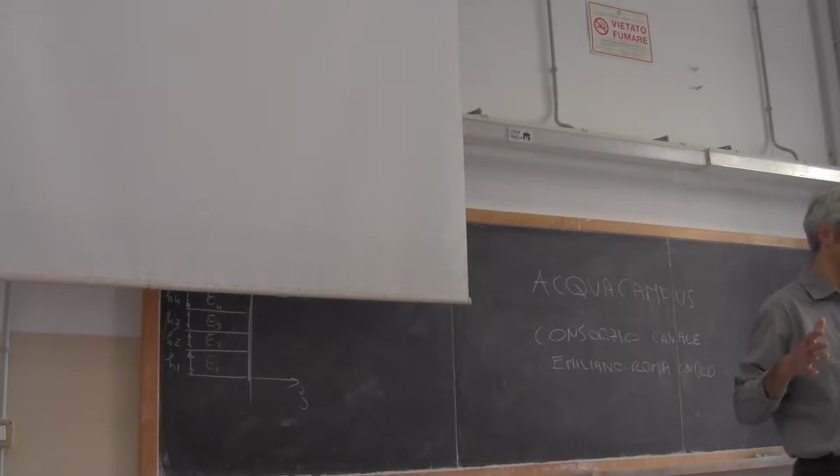They decided to set up testing facilities in a field experimental site, testing facilities finalized to test different irrigation techniques. So they basically test sprinklers, test the efficiency of gates operating on the canals, and they basically test what is called precise irrigation.

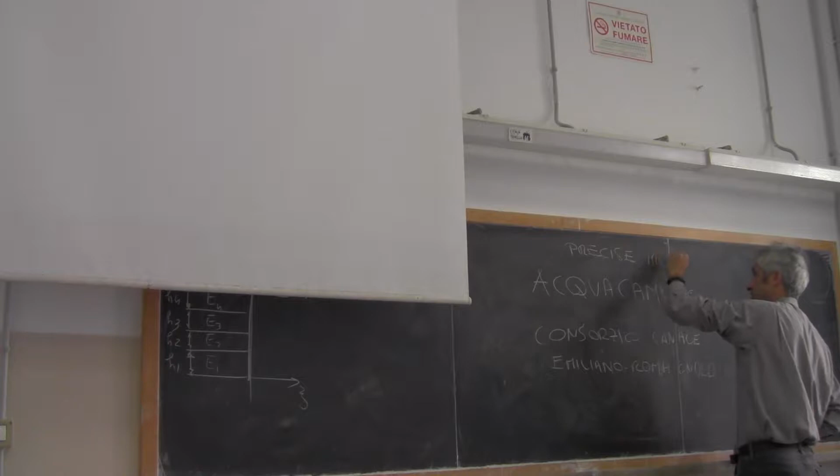What is precise irrigation? Precise irrigation consists in delivering directly to the plant the exact amount of water that the plants need. It is realized through maybe sprinklers, but more frequently through pipes that drop water directly where the plant is. These pipes need to work very efficiently because, as I already mentioned to you last week, if they are supposed to deliver the exact amount of water that the plant needs, this implies two things. First, a good estimation of the required amount of water by the plant.

Second, we need to make sure that that amount of water is actually delivered, which is not easy, because we cannot test every day if the pipe is working.

We need a kind of quality assurance procedure, and this is why they decided to test these irrigation techniques. The result is an experimental site where they continuously make tests and also dissemination. It's open to farmers to check the several different alternatives, open to students, and also open to the public in certain cases.

So what is the reason why we go there? The reason is that water for irrigation is the main water demand we have to deal with at the global level, the national level, and the European level. Irrigation covers about 70% of human consumption of fresh water, a percentage reliable at both the global and local level.

It's not what I wanted to get, but let me check. Okay, let's try, because we can't spend the whole day getting the PC working. So let me check what I wanted to show you.

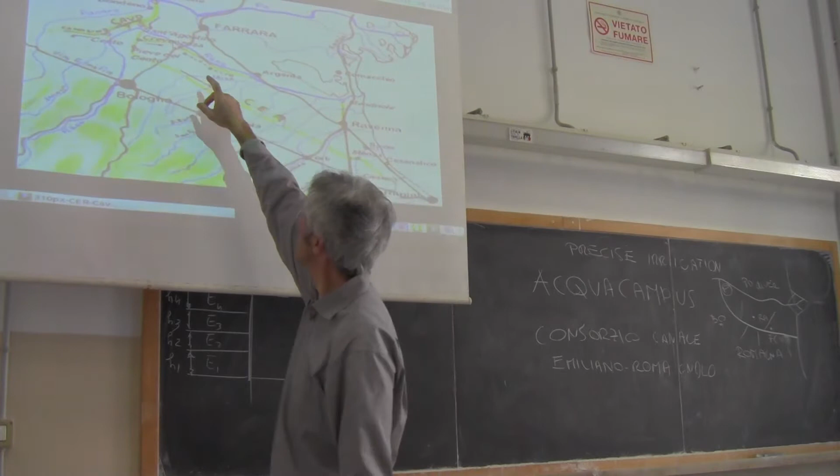Okay, there is a Wikipedia page, basically, with a map. So you can see here, up there is the Po River, and the canal is this one, or this one. So water is taken upstream from Ferrara a little bit, and then there is this yellow line, which is the canal crossing this flat area.

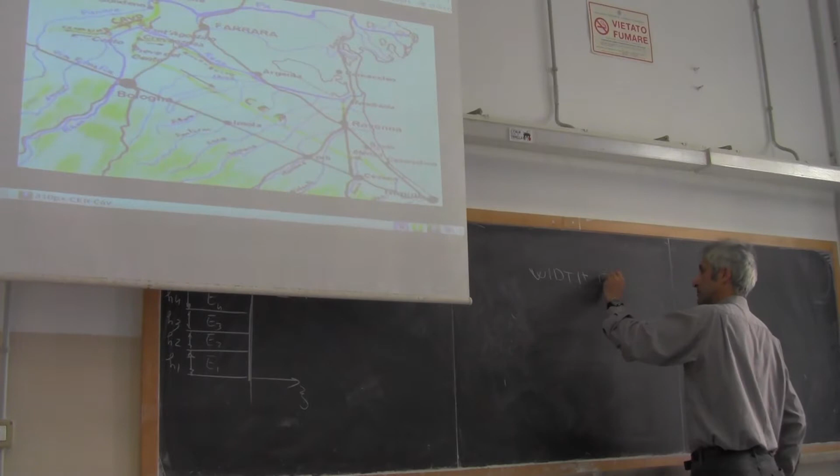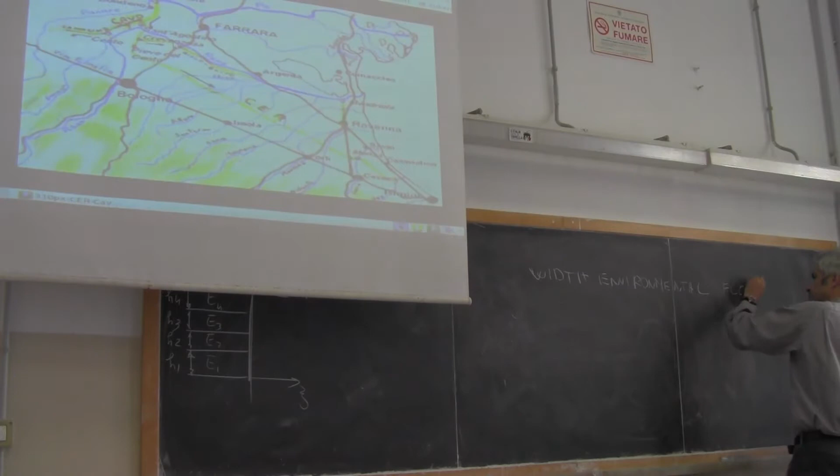Second thing before we move forward: we were supposed today... I asked you a question on Tuesday. The question was why our clients want to reduce the width of the environmental flow spillway. Width, environmental flow, spillway. So did you think we have any reply to this? Environmental flow, spillway. So, who has a proposed reply?

Nobody? It's not possible. Yeah, please. Excuse me, I have a question. You mean to reduce the width of the environmental flow, or the volume? No. What I said is that the environmental flow you have to release is the same, it doesn't change. And what is the definition of the environmental flow? It is required that you don't take any water from the river unless you have the environmental flow released downstream.

My question is related to how to release it. So if I go back to the figure, let me get the figure of the spillway. Unfortunately, I need to dedicate some more time to this projector because it doesn't work well. Okay, but in any case, let me get this figure.

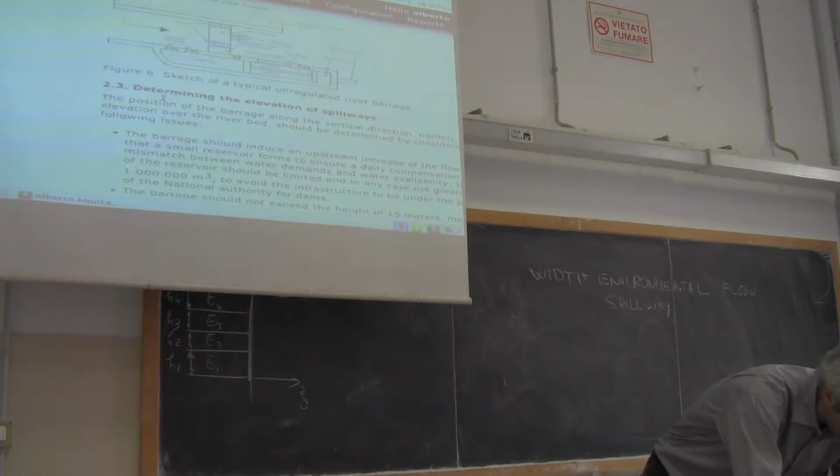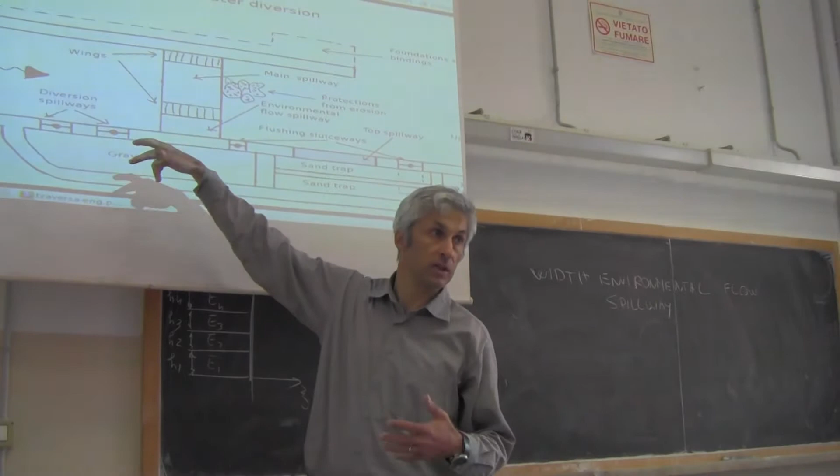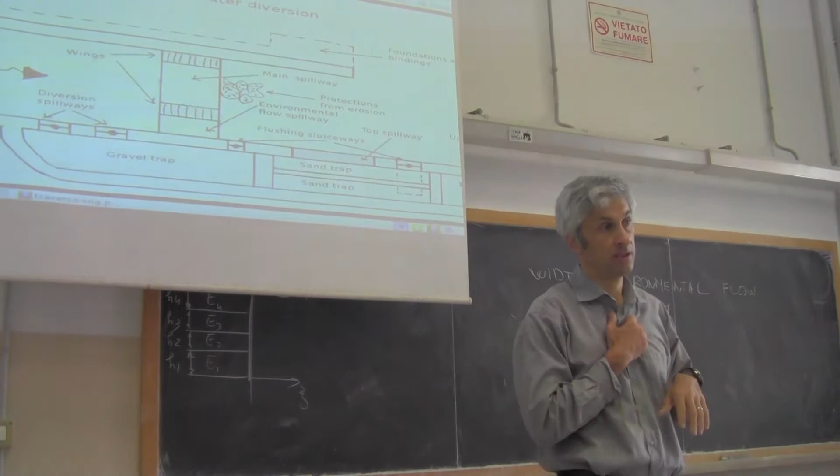So okay, this is the figure, this is the environmental flow spillway, which is located at a lower elevation with respect to the other spillways for the reasons that we know. And it has a width, something we have to design—typically 40 or 50 centimeters. My question was, why that width? Our clients want to make it not as large, like 20 centimeters, but we say no because we want fish to go through it, so we say 40. But my question was why they are interested in reducing the width of the environmental flow spillway.

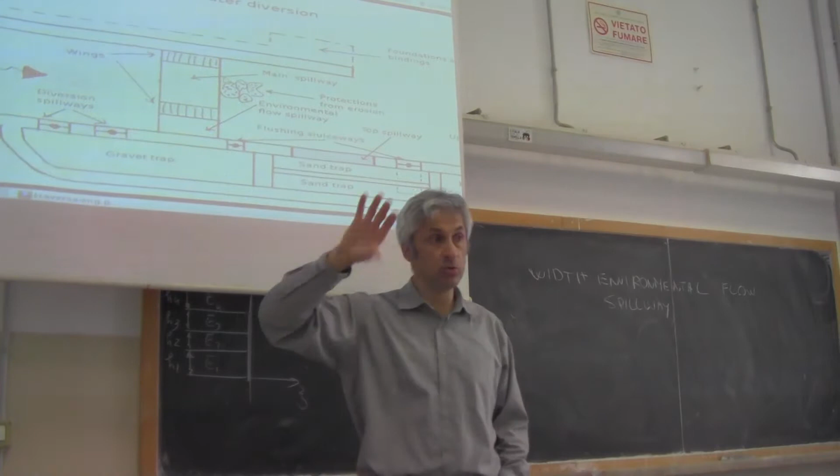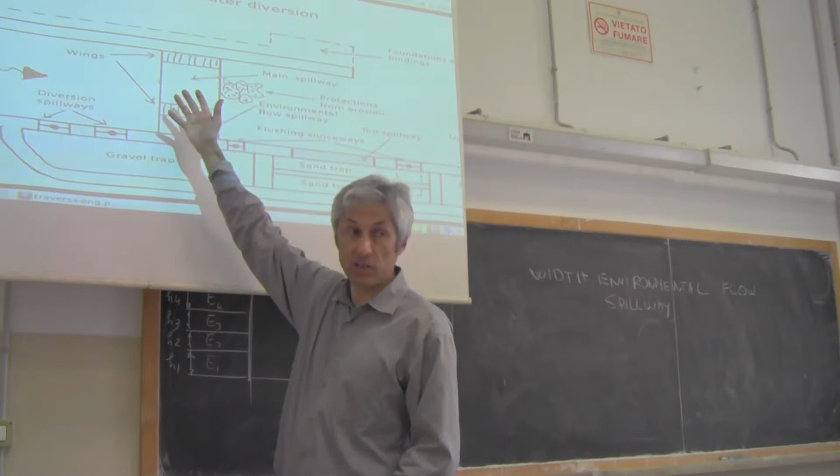Another thing I said is it's not regulated—we don't have a gate there, so water must flow without any facility that allows us to regulate the environmental flow. Any other suggestion on that? It's not easy, I understand, but no idea. We could make it even larger—if the river is large enough, we could say let's take it 1 meter wide, so we're sure fish pass through, and it's more accessible, but they say absolutely not. To reduce the cost?

So, do we have more velocity? No. Let's say, not to reduce the cost, but to increase the benefit. Maybe for flood mitigation? No. Because you reach the diversion spillway sooner? It's a bit close, but not really, because you know the diversion spillway, you locate the elevation by imposing that you reach it once the environmental flow is released.

Okay, first of all, did everybody understand my question? Yes, okay, so it's not a problem of understanding. Okay, now let me tell you the reply, and then I make some considerations.

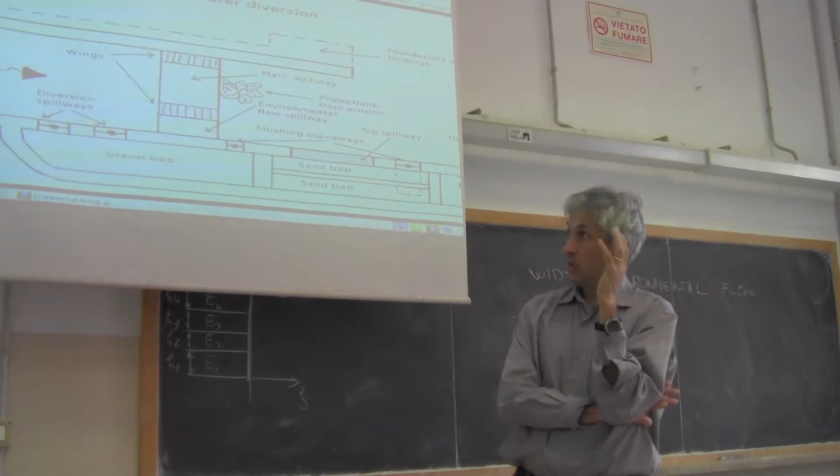What happens here? You have to think at what happens, look at the process, think at the functioning of this device, of this barrage. Every time you have a question, something you don't understand, look at what happens. Ideally you would go there to look at the functioning, and I'm quite sure that if you look at it, you understand why. But if you don't have the opportunity to look at it, you have to figure it out.

So what happens here? Let's suppose we start from a dry situation, and then some flow arrives. The flow goes downstream through the environmental flow spillway because it's the lower one. Let's suppose the flow from upstream increases. Then the water level increases upstream, in the pool that we originate upstream. The water level increases, and by increasing the water level, you increase the water flowing through the environmental flow spillway.

Why is that? Because remember there is a relationship to compute the flow through a spillway, which I write again here: the flow through a spillway Q is given by a coefficient μ, which we take as constant, times the width of the spillway—the width that our clients want to reduce—multiplied by delta H to the power of 1.5, times 2g to the power of 0.5.

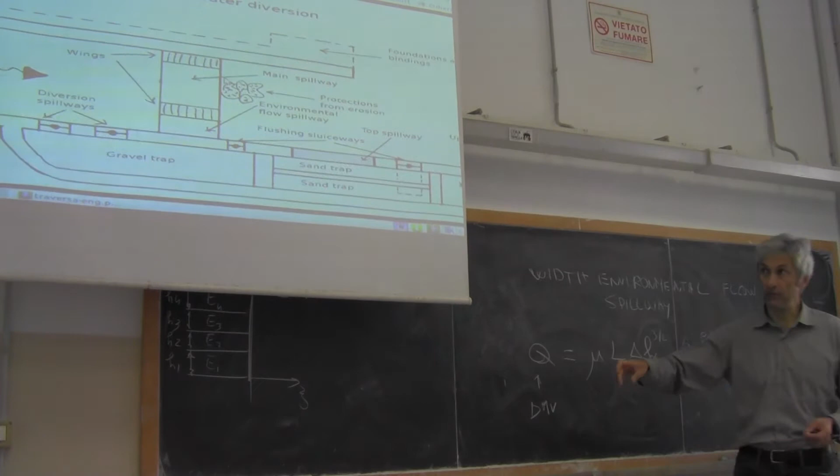But with increasing flow upstream, this delta H increases as well. And we want delta H to increase, because if it doesn't increase, we cannot get any flow. So in order to get our design flow, we need this delta H increasing again. But if delta H increases, the flow through the environmental flow spillway increases as well and becomes larger than the dmv.

This is something the client doesn't like. Ideally, the client would like that once we release the environmental flow downstream, it doesn't increase anymore. So ideally they would like to put a gate there, because they want to reduce the cross-sectional area of this release of water, to keep the release constant, equal to the environmental flow. But they can't put a gate there.

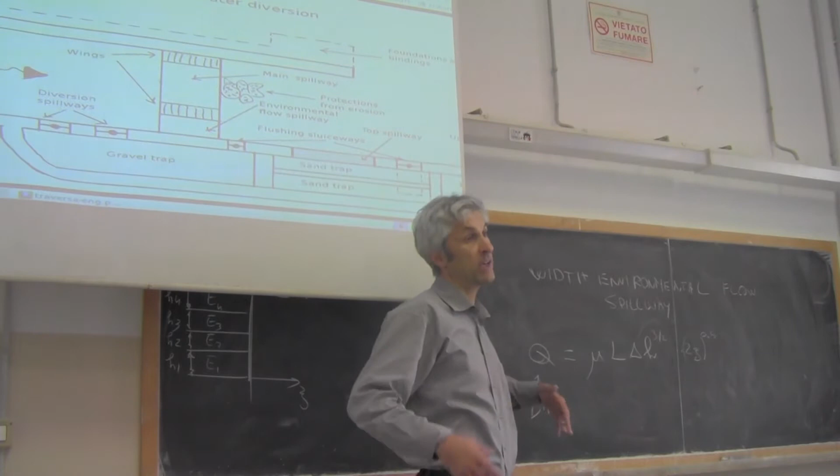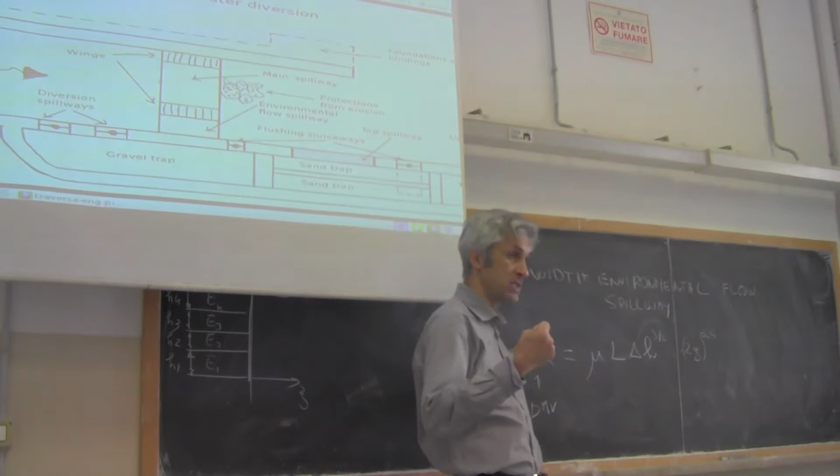This is one of my premises: I said we can't put any regulation facility on the environmental flow spillway, and therefore the flow through it increases as they withdraw water, and becomes higher than the dmv. This excess of flow is a loss for them—it implies a reduced benefit.

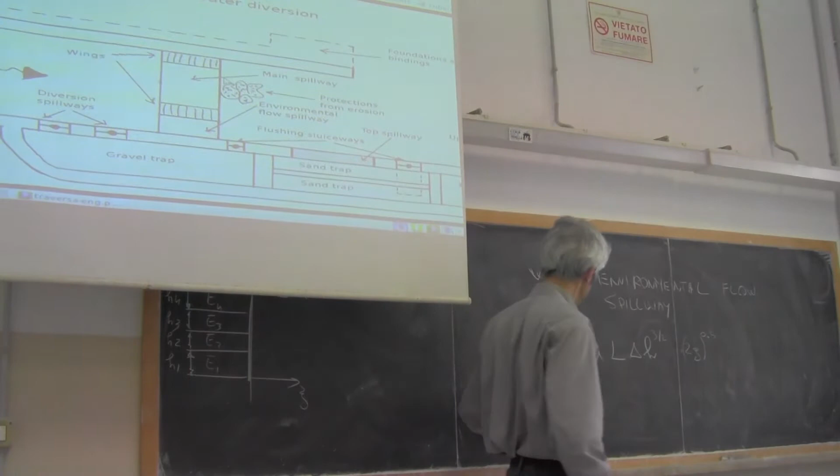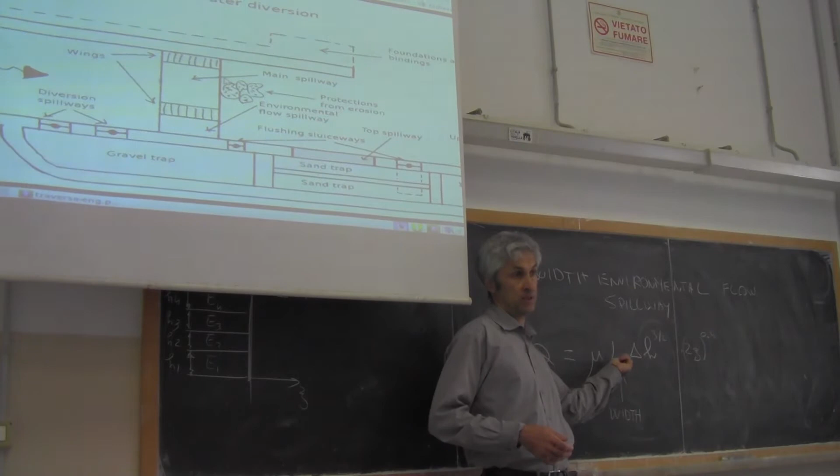How much does this flow increase for increasing water level upstream? The increase is given by this relationship, and you see that the larger the width, the larger the water that is consumed for them—this is the width. So they realize this, and therefore they say, please reduce this, because it's a way to limit the excess flow through the environmental flow spillway.

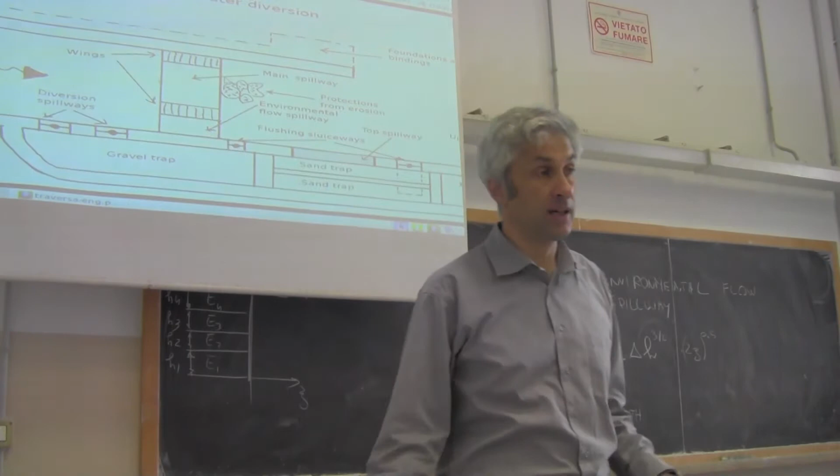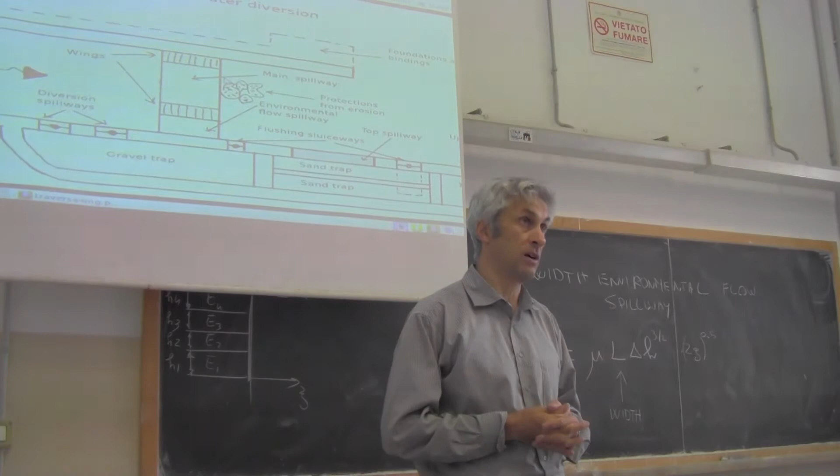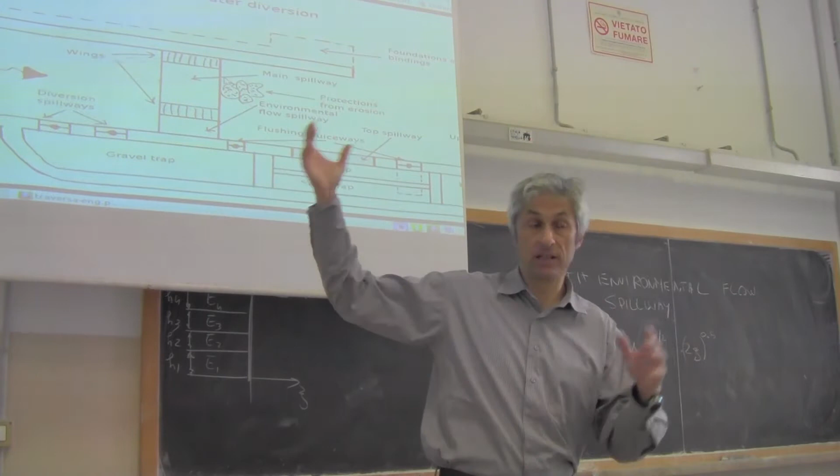It's not an easy question, but you should have found your reply by thinking about how it works, about the processes, thinking about water flowing through this barrage. This is a general suggestion I give to you. There is a saying attributed to Leonardo—actually it seems he didn't say it, but we're not sure—that when you deal with water, you first have to use experience and then the theory, meaning use expert knowledge first and then the theory. I think it's a useful example: when you design something like that, try to figure out how it works, and then use the theory.

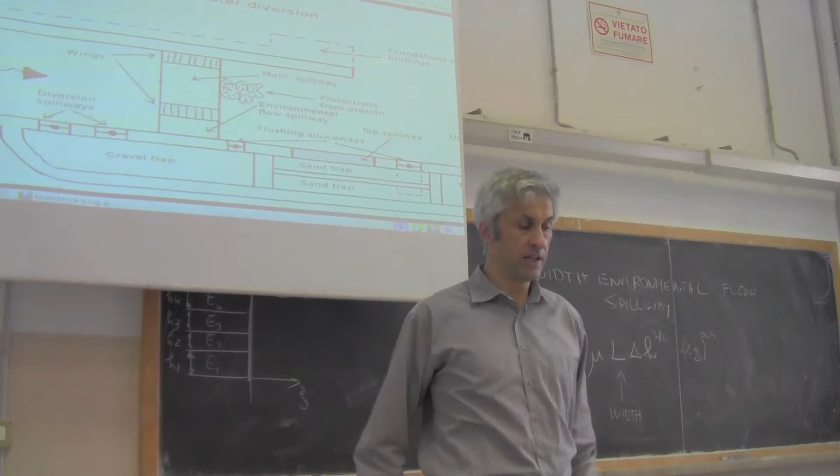Let's see if you can find questions which I can't reply to. Who starts? First of all, raise your hands if you have a question, really. Okay, almost everybody. I think we have to be cavalieri, as we say in Italian. You start. No, I meant him.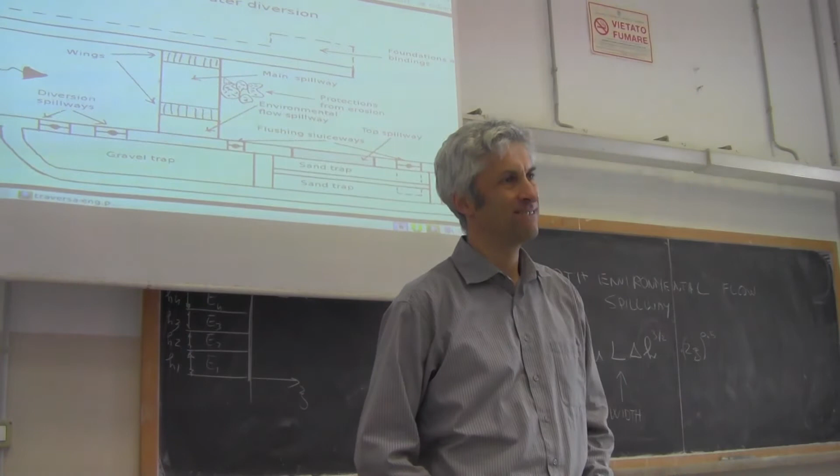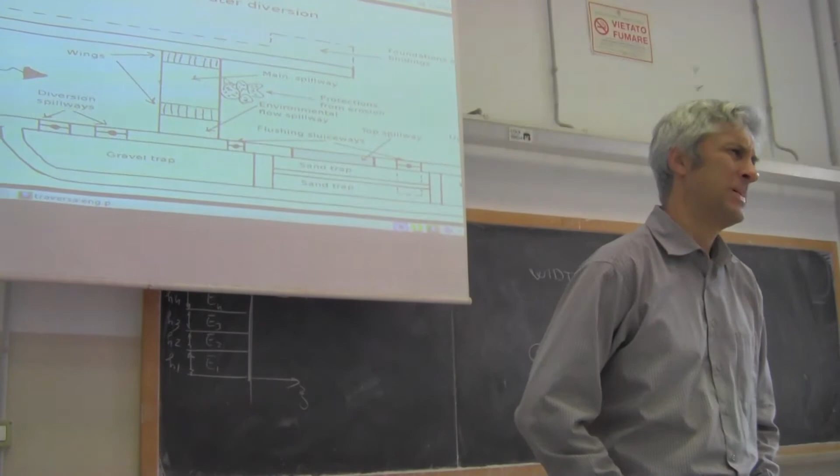I saw a project on the internet. I want to know for which reason was developed the KARSYS method by SISKA, the Swiss Institute for Speleology and Karst Studies, and what was the outcome of this. Sorry, I don't understand, can you please reply? For which reasons was developed the KARSYS method? The KARSYS, with K-A-R-S-Y-S.

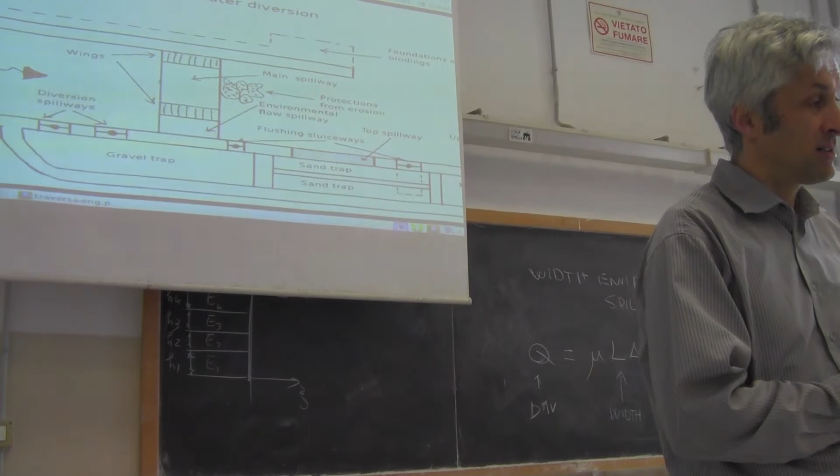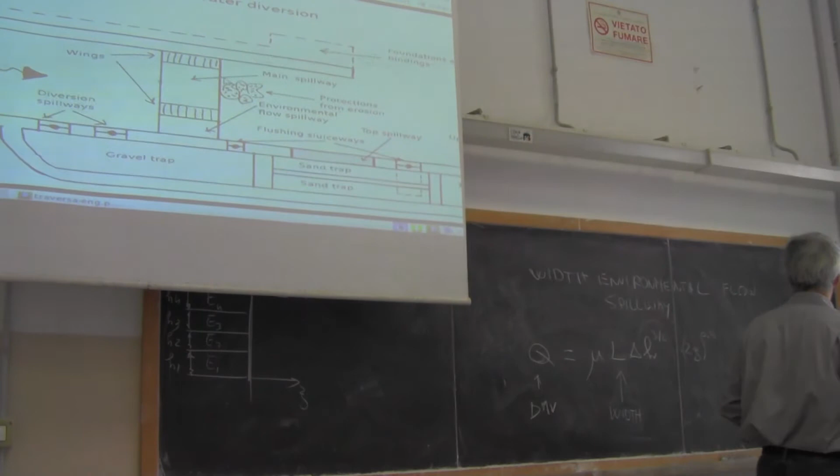Just one second, sorry, it's my English. You mean karstic? What is karstic? I don't understand. Sorry, I found it.

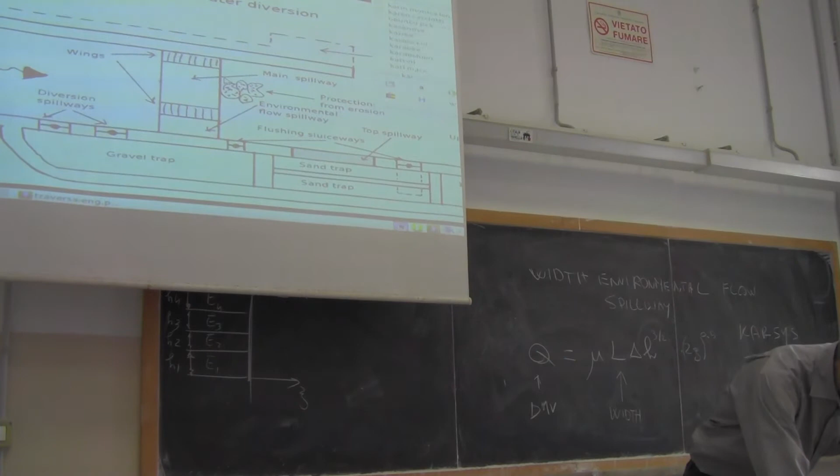It was a method developed by SISKA, the Swiss Institute for Speleology, to study the aquifer, the karst aquifer. A pragmatic approach to karst hydrologic system conceptualization, assessment of groundwater reserve. What is your question? I want to know what is the outcome of this and for which reason was that.

Basically, I didn't know about this, and I still don't know. But I can realize from here that it's a method to study karst systems, so I can provide a preliminary reply. What is the problem with a karstic system? A karstic system, basically, it's a karst phenomenon.

It's a water flow that takes place in karstic areas, where the rocks in the substrate, beneath the soil, usually at a certain depth, we have a rock substrate, and the soil is the result of degradation of the land cover, which contains some organic content. The depth of the soil varies, but if you go very deep, you find rocks at the end. If the rock substrate is erodible, water flowing over it may erode this substrate and dig tunnels like caves. Most of the caves open to the public are located in karstic areas, and karstic flow is a preferential flow.